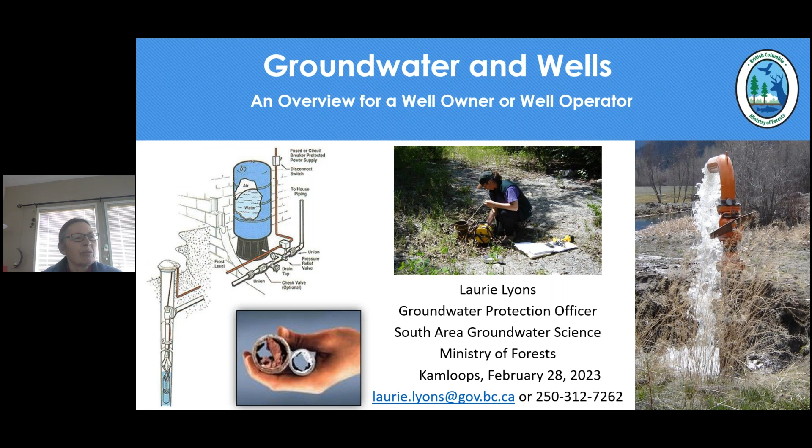Yes, many of the common groundwater well problems involve water quantity and quality. These may be naturally occurring or from a man-made issue. Identifying the cause of the well problem is necessary to determine what treatment to use to effectively fix the problem. Early detection and diagnosis of a well problem may prevent you from having to decommission the well and drill a replacement well.

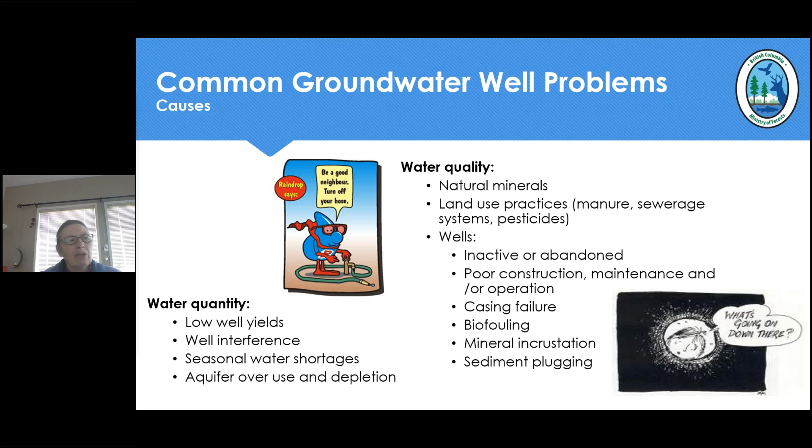Detecting a decline in the well's capacity is key to successful rehabilitation. If the well's capacity declines greater than 20%, generally, preventative maintenance is no longer going to be effective, and chemical or mechanical rehabilitation will be required. So understanding well deterioration causes is essential to designing effective preventive maintenance and monitoring programs. Your groundwater knowledge and understanding the components of your well and how to properly maintain them will help ensure well yield is sustained and protect your water quality.

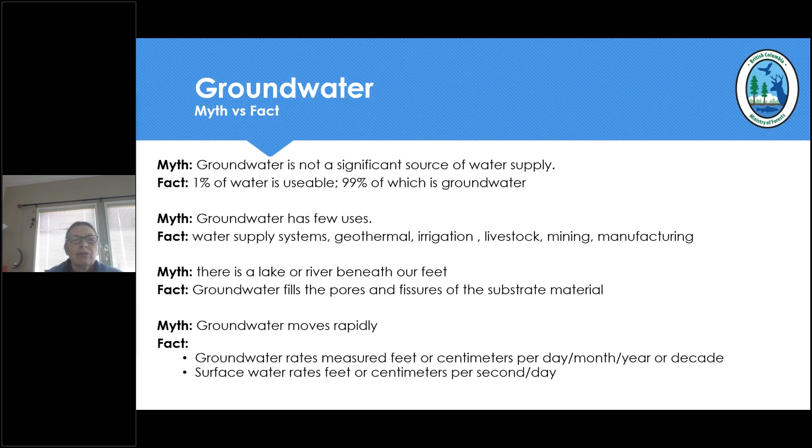To groundwater. 1% of the water on this world is usable, and 99% of that is groundwater. Groundwater fills the pores and fissures of substrate material. Groundwater moves very, very slowly. It's measured in feet or centimeters per day, month, year, or decade. Thus, the water you use from your well is often years old, or it can be hundreds of years old. In comparison, surface water rates are measured in feet or centimeters per second per day.

Another myth is that there's lots of water and it doesn't need to be conserved. That's not exactly true, as pumping groundwater at a rate greater than the recharge rate, which is replenishment of the aquifer, depletes aquifer storage capacity, resulting in serious groundwater mining. And subsidence is known throughout the world.

Probably 80% of subsidence is from groundwater in the US. Parts of Mexico have dropped 10 meters in 70 years, which is a lot.

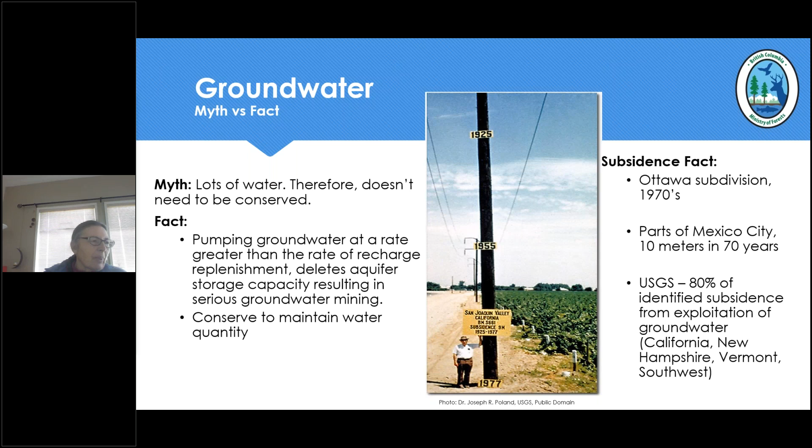The amount of water on Earth remains constant. Basically, ever since the Big Bang happened, we have the same amount of water now as we did then. What is different is where it's stored. The hydrological cycle describes the continuous movement of water on and above the Earth's surface.

Water moves from one reservoir to the next, glacier, ocean, and groundwater, by physical processes of evaporation, condensation, infiltration, runoff, and subsurface flow, as it changes through its states of liquid, vapor, and moving through the closed loop water cycle.

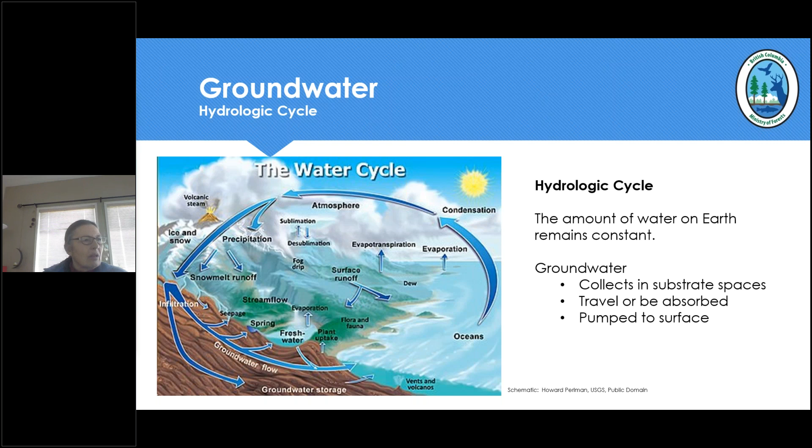This here is a schematic of a typical BC interior aquifer. The bedrock is formed from folded and faulted volcanic and sedimentary rocks. The valleys are carved out by glaciation. The glaciers melt, they deposit layers of silts and gravels. Then a river courses through the alluvial deposits, carving out cliffs of silt layers and gravels.

Wells drilled in the lower valley aquifer bottom are very highly productive, and these wells are often connected to a surface water body, depending on the substrate that they are completed in. The permeability of the materials affects the rate of precipitation infiltration, storage capacity, as well as the rate of contamination movement.

The upper sand and gravel aquifers are very vulnerable to surface contamination. Deeper aquifers below a low silty confining clay layer are less vulnerable to the surface contamination. Thus, well siting is important. If you have a well that's high, dry, and sealed, it's probably going to be sustained and receive less contamination than if your well is constructed in a low-lying area, not sealed, and will receive runoff.

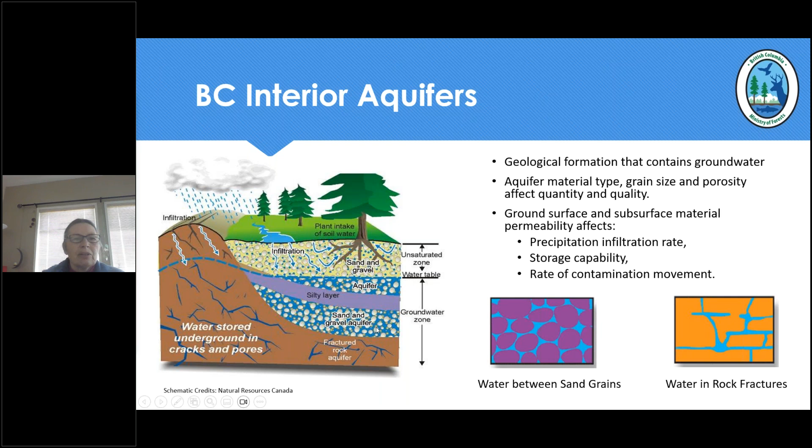The particles of the substrate, as you can see, the water fills the fractures in the bedrock, as well as filling these pores here, as I mentioned earlier. And here's the silty clay layer, and so the aquifer below is the confined layer, and the one above is the unconfined layer.

There's a lot of aquifer resources on our ministry website, and if you look at any of the mapping programs and you see an aquifer and then there's boundaries, but beside it there's no aquifer, that does not mean that there's no aquifer there. What it means is that we do not have enough information to delineate an aquifer in that area.

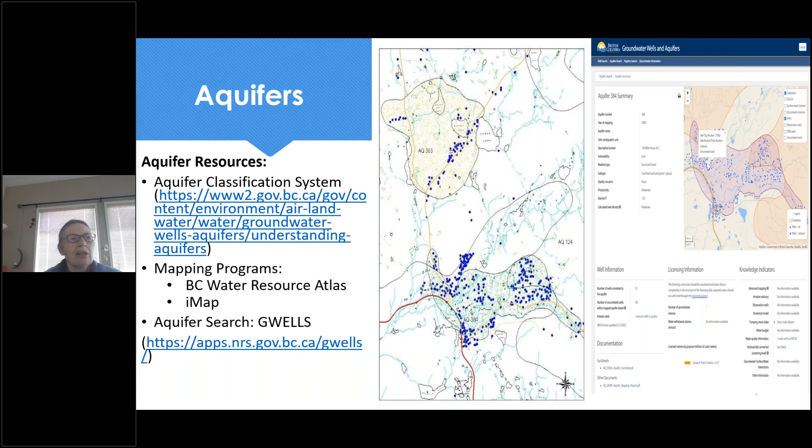Aquifer mapping provides regional context for groundwater development, enables priority setting for groundwater quantity and quality monitoring, and increases the understanding and sustainability of management of the valued resource of groundwater. It also will initiate a lot of groundwater and surface water interaction studies.

Well reports, well registration, and water licensing. They're all very different. The well records and consultant reports are very important. These provide you information of what type of material that your well is constructed in. They will also have the depth and screen intervals and water bearing areas. This is very important so that you get the right type of pump and the screen development is done correctly, as well as the size of the screen slots.

Submission of well records became mandatory on March 1st, 2016. This is the responsibility of the well driller for drilled wells. However, for dug wells, it is the responsibility of the well owner to complete these forms and submit them to the province. Prior to March 2016, well submission was voluntary, and many of the well records were submitted by the drillers as well as well owners. And these well records are entered into our provincial database, ensuring that your well is registered.

A water license is mandatory for groundwater use since March 1st, 2016. The exception is domestic use, single family dwelling. Thus, all small water systems, or most, will need a water license. Information is available on our website for water licensing and rights, as well as an application form. If there's an issue or you have questions filling out an application form, you can contact Front Counter BC.

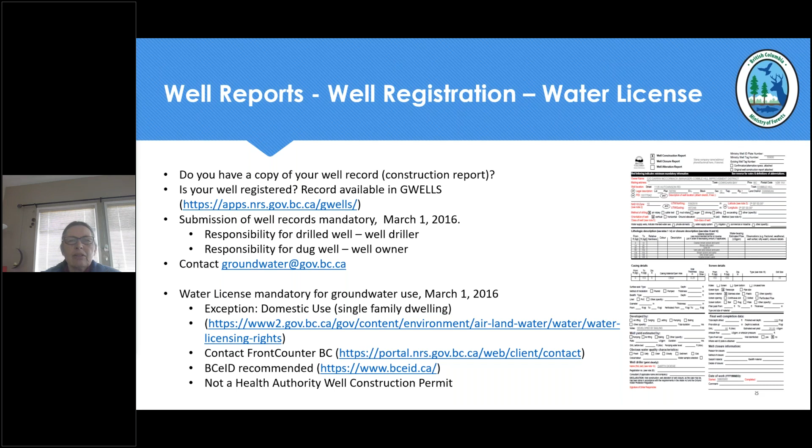It is recommended that you apply for a BCeID prior to submitting and completing a well water licensing application, as this will allow you to save and track your application. A water license is not your health authority well construction permit. They are very different processes and through different levels of government.

GWELLS. You can also get different aquifer information and well information here, as well as a registry for the drillers and pump installers. You select the tab at the top of the page here and enter your information here, and you should be able to pull up your well record. All these little blue dots are the well records.

On the registry, this is a requirement as well. Drilling and pump installing is a legislated activity, and thus we will have a registry of active and available well drillers and pump installers that can work in the province of BC.

The Water Sustainability Act restricts well construction, decommission, and pump installation, and it outlines the minimum standards for all these events. And also it will give you the requirements for flowing artesian wells, and it outlines the roles and responsibilities for well drillers and well pump installers.

The province issues the well drillers and pump installers a card similar to what you would have like a driver's license, about that size, and it will have on there what they can do, whether it's pump installation, if it's well drilling, or what type of well drilling is it? Is it geotechnical only? Is it monitoring wells only? Or is it water supply wells? All this information will be on there. It is also in the registry.

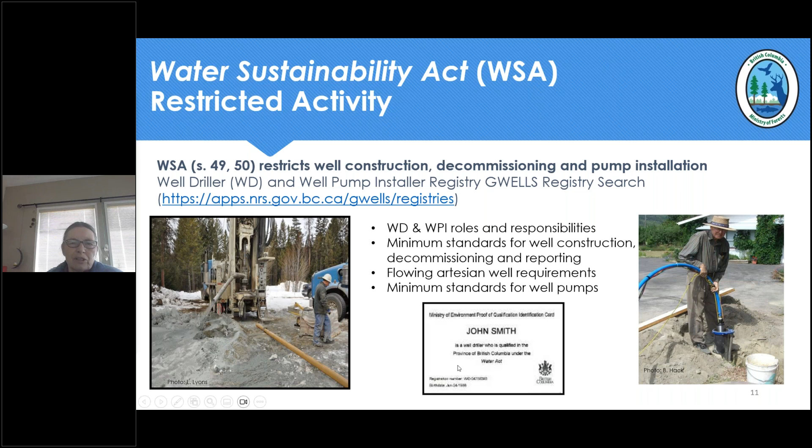Components of your well. There's the borehole, the casing, which you can see. The surface seal, you may or may not see it, as you can install a surface seal about 1 foot below the ground surface. And the well intake and the screen, this is down at the very bottom, and there'll be a K-packer in here, and that will keep the screen in place. Also, it may have a slotted liner, PVC liner, throughout the well casing.

The pitless adapter is your connection, and it's here, and it's to your water supply system. The pump needs to be properly matched with the recommended pumping rate so that you do not draw down the water below the pump and overpump the aquifer. You will have a secure well cap on top of the well.

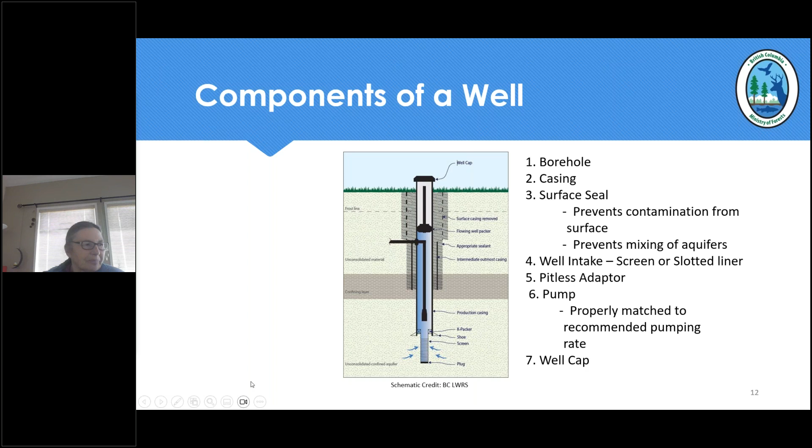Why hire a pump installer and well driller? It will protect your resource. It may also save you some money. Well owners are able to construct shallow wells less than 50 feet in depth, but they must be constructed to meet the groundwater protection regulations. However, it could take you days, months, years to do that, and a well driller may be able to do it in half a day or a couple days.

When you open your well, if you take the well cap off, you will see wires, cables, and ropes all stuffed in on the top of your well casing. It is very important that you do not pull them, as they are there for releasing the pump and to pull it up, as well as releasing the pitless adapter. And if you do pull on them and it does get released and it drops down, it could be quite costly because you may not have the rope anymore to pull the well pump and drop pipes out of the well. Thus, you might have to fish for them, or you might have to close the well and decommission.

Also, if there's a sudden decrease in pressure, your water system will create a vacuum and your pressure tank may collapse just as this one did. Also, here's a pump that was burnt out, maybe an oversized pump for what the well capacity was. Sometimes if you don't have this information, it might be a bit of a guessing game to get the right size of pump and the rate of pumping.

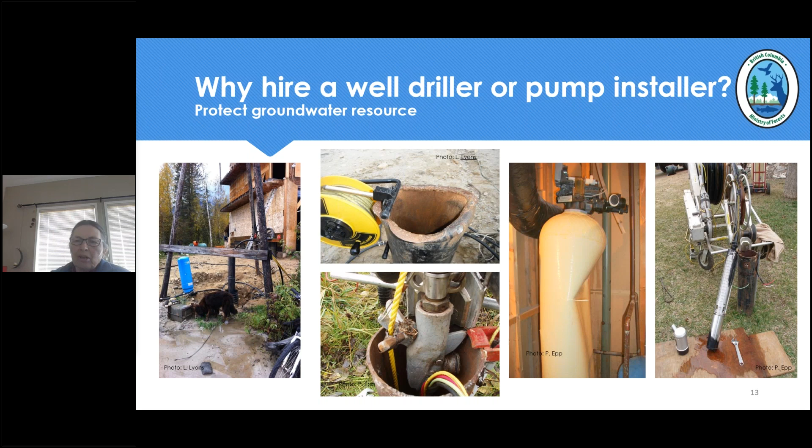Well location, very important. You should be set back from contaminants, and contaminants should not be allowed to travel or be stored within 3 meters of the wellhead. Consider where your contamination sources are. Obviously, a sewage system is a source of contamination, and it should not be placed right beside your well, because as you pump the well, you speed up the travel time of any contaminants.

Also, with wells close together, you can have interference. They are allowed if you are the owner of both wells. As in this case, this was actually a school, but rarely are you pumping both wells at the same time. They may be low producing wells and you pump one and then the other into a storage container, and then it's used from there.

Also, consider where your wells are in relation to buildings. The equipment for drilling and pump installation is quite large. And if they can't get over top of the well to fix it, you may have to remove a building, or the well may have to be decommissioned and a new well drilled.

Also consider where your power lines are going, as a power line over top of a well might require BC Hydro to disconnect your power so that the well can be worked on, or it may result in periods of shutdown for the well driller, because if the wind is blowing, those lines will move a lot and they may become entangled into the drill rig.

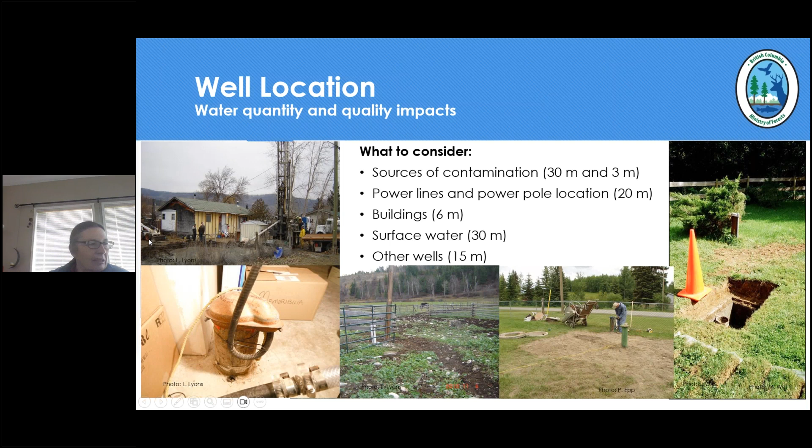What kind of well do you have? Is it abandoned, inactive, as in this first picture? This also could be an abandoned, inactive well in a pit. Do you have a dug well? Do you have a drilled well in a pit or vault, which was very common prior to the invention of a pitless adapter? This was done so that the water didn't freeze, as you generally came out of the top of the well and then it went underground and connected with your water distribution system in the houses.

As you can note in this here, the water was above the electrical. I'm sure this resulted in some wiring shorting out. You may have a drilled well, and the pump installer may install this plastic PVC box on the outside. This is usually for extra security and attachment of the cables and wires inside the well.

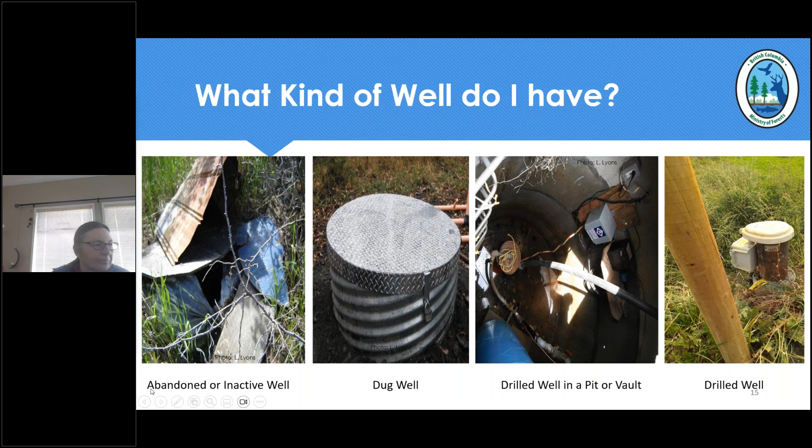Inactive and abandoned wells can impact your water quality. And if there's enough sedimentation going in, they might even impact your water quantity. It is your legislated obligation to maintain wells until they are decommissioned. Decommissioning is required after 5 years of not being used. You must hire a well driller or pump installer to decommission the well.

In this photo, this person is decommissioning the well. And it's probably a deep drilled well, as it's got a tremie line in, and they're pumping grout slurry into the bottom of the well, and it will gradually fill, and they will withdraw the tremie line and fill it to the top of the line and put a cap on top, and then backfill and put the pavement back.

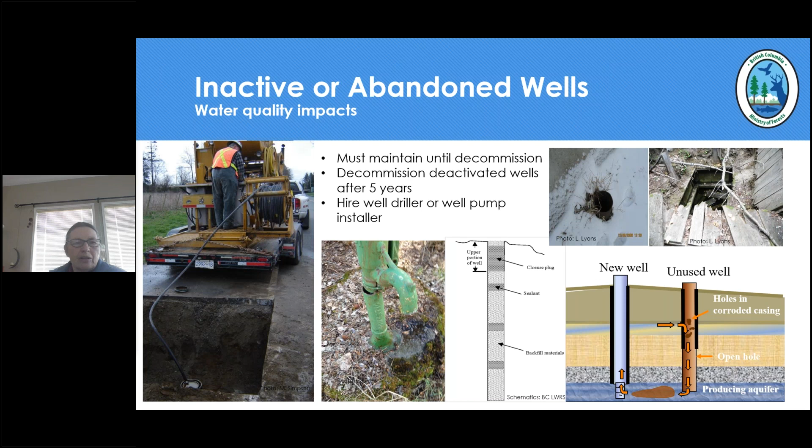Types of well construction standards. They're very similar for dug wells as well as drilled wells. The surface seal must be installed. It needs to be 15 feet or 5 meters in length and 1 inch thick, or fill the void if you are constructing a dug well. You can also, for a dug well, give it a consistency and sort of mold it around the well casing so that it's 1 inch or 2.5 centimeters thick.

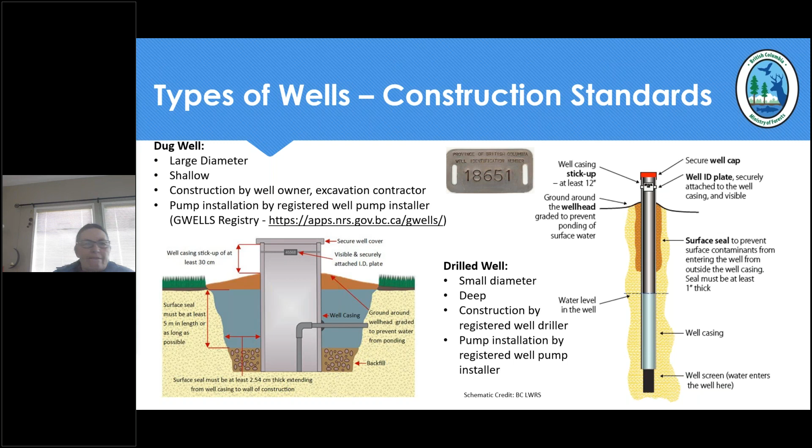Dug wells as well as drilled wells both need secure well caps and covers. All water supply wells require a well ID plate attached to the casing. And bedrock wells: drilled wells into bedrock must have the casing securely anchored into the bedrock for 1 meter.

We recommend a PVC liner be put in these wells, mainly because if you leave it as an open hole and you have your pump in there, it's not a legislative requirement to have the liner, but if that rock falls off and wedges between your pump and the borehole wall, you may not get that pump out, and that could be very costly. You may have to decommission it to fix it because you can't get the pump out.

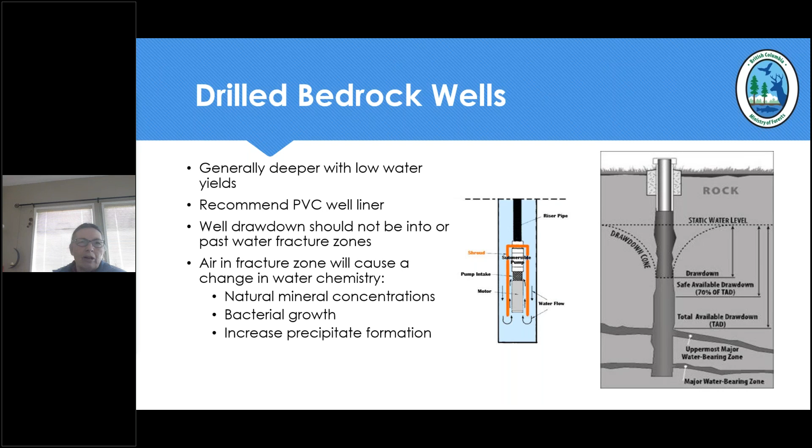Wells in pits also must meet the well construction standards. You must have a stick up of 1 foot above the floor of the pit, a secure well cap, and they must be drained. If they are not draining properly and the pump kicks in, often that water can be sucked down into your well, impacting your water quality.

If a well is altered, we highly encourage well owners to bring the pits above ground surface. And if not, then a professional needs to be hired to design the pit and oversee the construction. And the same for constructing new wells and pits. These designs and as-built drawings must be submitted to the comptroller for approval prior to construction.

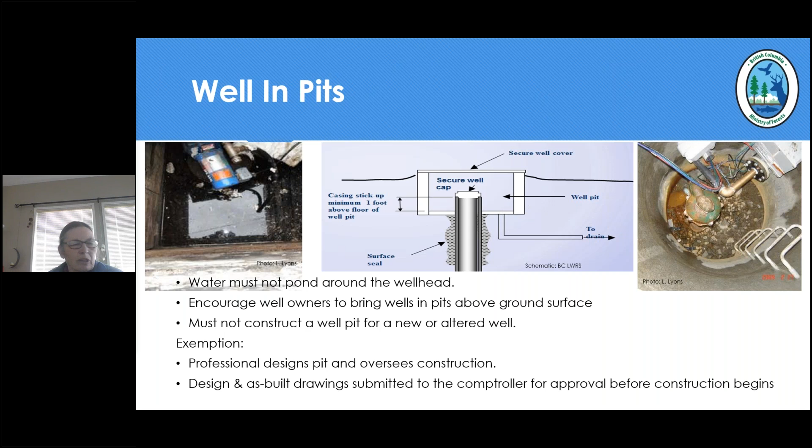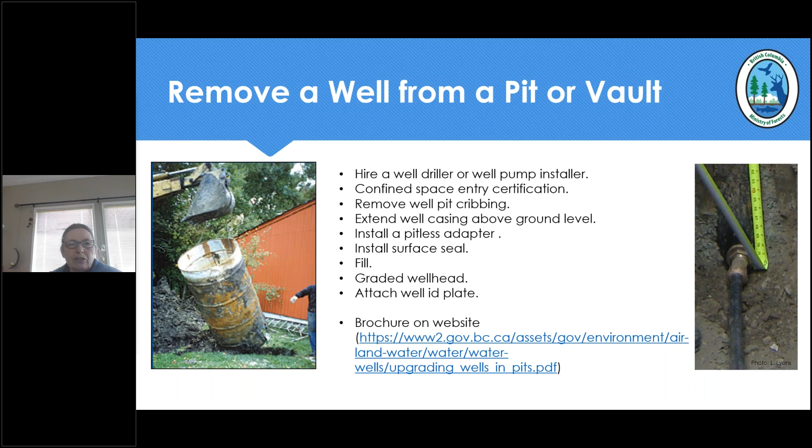Removing a well from a pit or a vault, you must hire a well driller or pump installer. If it's a flowing well, you must hire a well driller with confined space entry certification, removing the cribbing, extend the casing, install the pitless adapter, surface seal, backfill, grade around the wellhead, and attach the well ID plate.

Surface seals. Here you can see that the surface seal is continuous in the photograph on the right here. And you can see that it completely fills the borehole. And once the pump installer is done installing the water distribution line here, then they will reinstall the surface seal and backfill.

Here you can see the grout at the ground surface. Grout will also be for flowing artesian wells or high pressure wells between multiple casings. And you can see that, and it will be also around the outside of this casing.

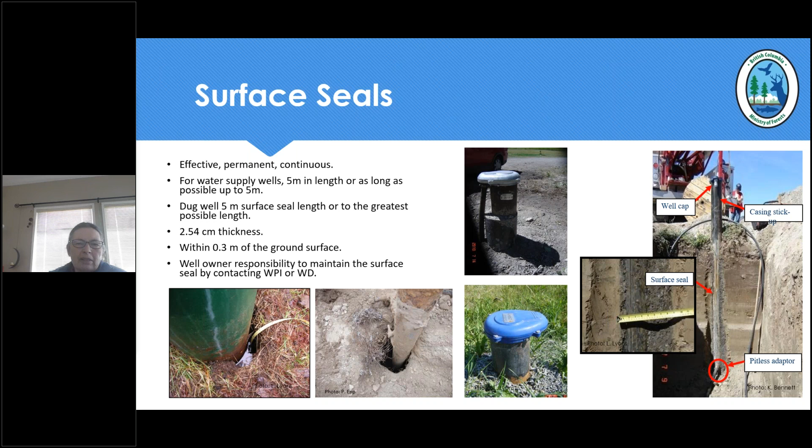If you do see an annulus appearing around your well casing, do not fill it with pea gravel. This only accentuates the movement of water as well as contaminants down along the well casing. It is your responsibility to maintain the surface seal by contacting a well driller or pump installer to replace the well surface seal.

Well caps and covers. They must be secure and vermin proof. Thus, flower pots, pails, plywood, rocks are not sufficient well caps and covers. If you have a hand pump, it must act as a secure well cap. Punching holes for ropes to be wrapped around the outside of the well casing will impact the well cap, and it makes it no longer a secure vermin-proof cap.

Sanitary seal well caps are approved, but the bolts must be in place. These hold the plates together, and also tightening those bolts will push the rubber out and seal it against the well casing.

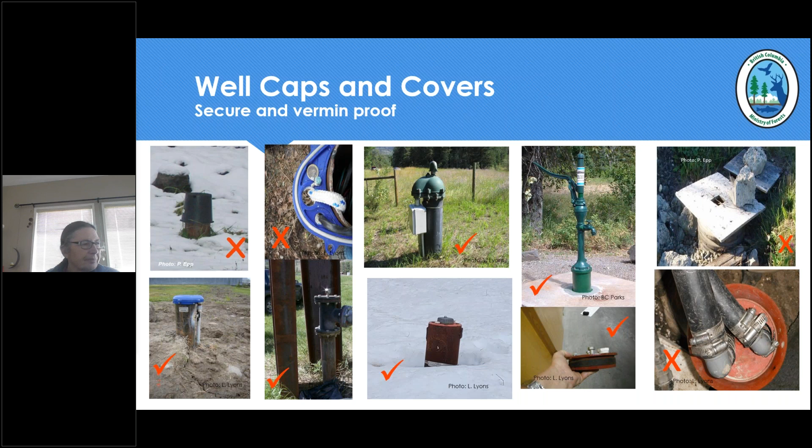Also, if you're spreading fertilizers and stuff, consider where you're spreading close to your well, as these pellets melt when water comes, and you don't notice or maybe taste or smell the fertilizer in there. It is only detectable if you are taking regular chemical water samples and having them tested by the lab.

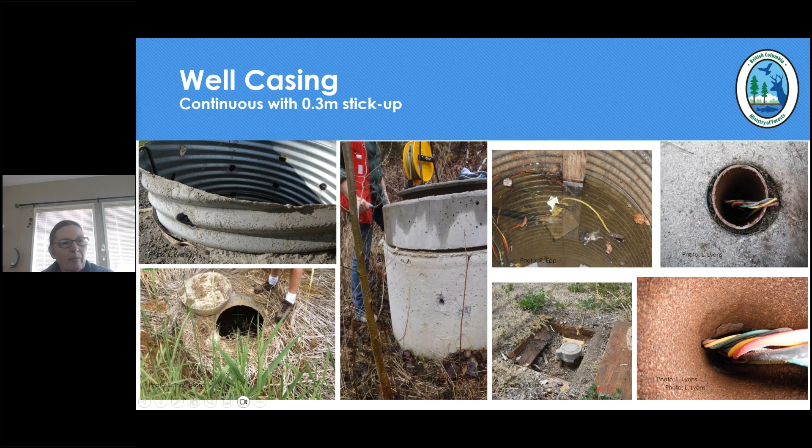Wellhead accessible and protected. You must protect them from physical damage. Well casings, even if they're steel, they can become damaged and dented, and you will not be able to remove the pump. PVC deteriorates in sunlight, and also they spiral or fracture if you hit them.

Keeping contaminants and trees and things back from the wellhead. Roots, they love holes in well casings, and this will decrease the availability of the water for your distribution system. This well does not have a cap on it. There was about 1 foot of debris in that well. I was amazed that it was still working.

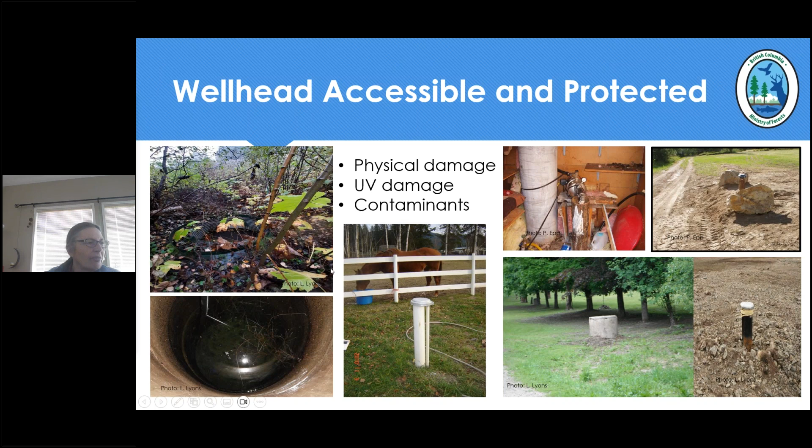As I mentioned before, contaminants should be 3 meters back from the wellhead. Even though this well is very clean, it is open to the dug well below the floor. If these paint cans spill, there is the potential for it to flow directly into the well.

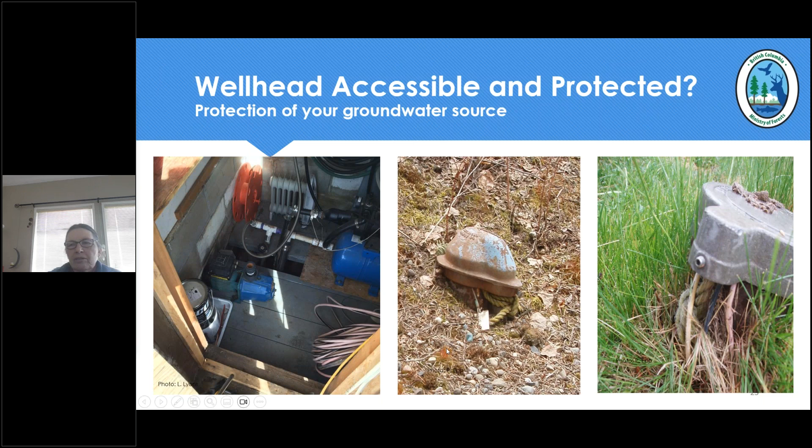Also, this rope, if it's exposed, it deteriorates. Also, there's potential here for more contamination to get into your well. And here you can see that even rodents have been chewing on the wires and stuff. So protecting your well and your source of water.

Good summary for the legislation. Where are your contaminants stored? Location of your well. Protect your well casing from damage. It must have a stick up of 1 foot above ground. Replace a damaged or lost well ID plate. Have a secure well cap. Keep the ground sloped so water doesn't pool around it, and fill any visible annular space with sealant.

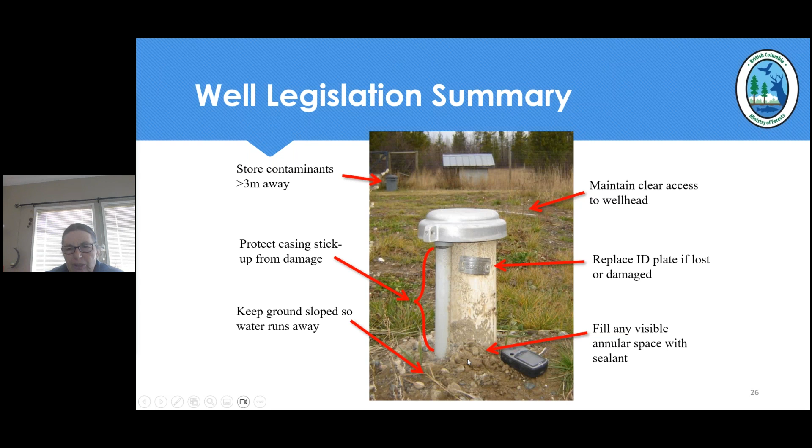Artesian flow from a well must be controlled. This can cause flooding damage and subsidence. It may lower the confining pressure and affect neighboring wells, springs, streams. Artesian wells must be constructed and decommissioned by a water well driller.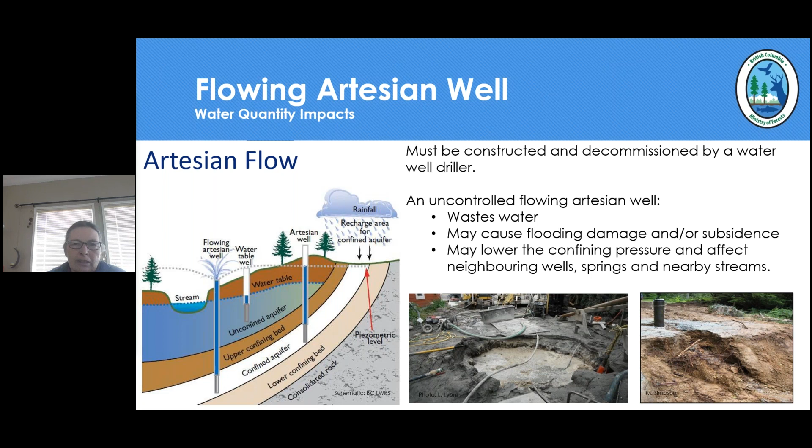If artesian flow is encountered suddenly, you should contact and get a well driller or professional that is competent with drilling and controlling flows on site immediately. Flowing artesian wells are under control when they're clear of sediment and the flow is entirely through the casing. Here you can see the flow is coming outside of the casing.

They must be mechanically controlled either with a shutoff valve or with a mechanical packer that is installed outside the well casing. This is great for low flow wells, and this is the preferred method with a big shutoff valve for high flow wells. Often they will have multiple casings, and even other wells that are under pressure will have multiple casings to ensure that the pressure is not loosening the casing, as well as flow is contained below surface and through the casing.

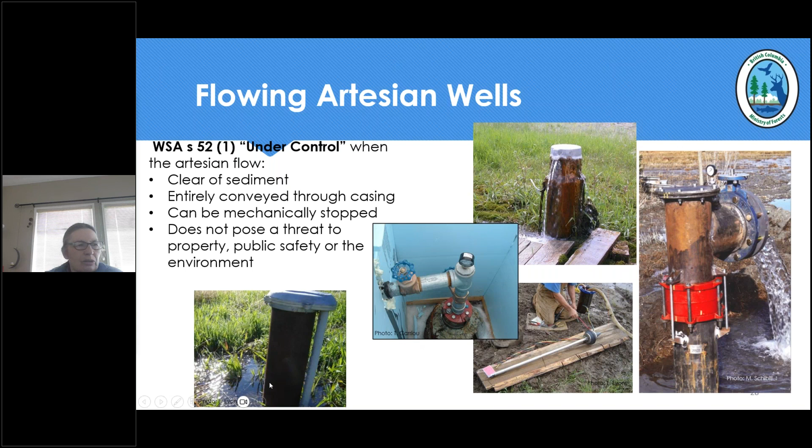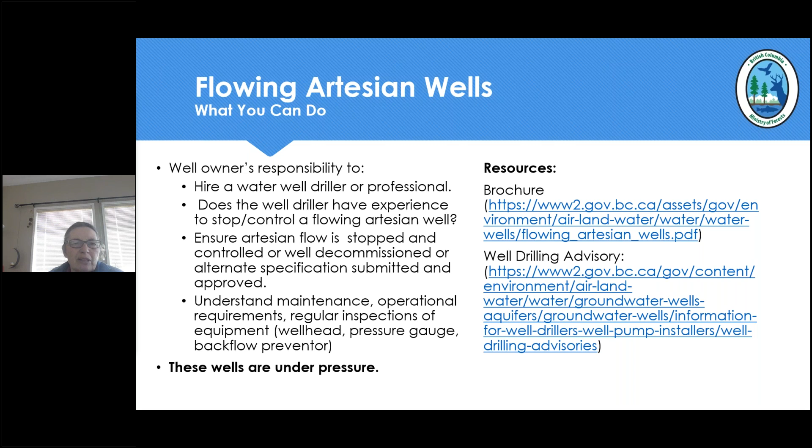It is your responsibility, as I mentioned, to hire a well driller or professional with experience of flowing artesian wells. It must be stopped or controlled. Also, alternate specifications can be submitted for approval. Understand the maintenance and operational requirements for artesian flow wells, because they will be equipped with pressure gauges, backflow preventers, and you must be able to maintain this equipment.

Aquifer depletion. It is not always from flowing wells. It could be overuse, drought, climate change, and also if you had noticed a drop in well yield, it may not be. It could be something that's happening downhole in your well. This is a provincial observation well. We measure the water level hourly and periodically the water chemistry. From this are generated state of environment reports that are available on the website. They will say if the aquifer that it's completed in is stable, declining, or increasing. So yeah, there's lots of information.

Also, with the observation wells, you can look at the hydrographs and you can see for the interior aquifers that the main recharge happens in the spring from the snow melt, and there is a smaller recharge in the fall from precipitation. In the coastal aquifers, it will be the reverse. The spring will have only a smaller recharge from the snow melt. The main recharge for coastal aquifers is in the fall, and that's from precipitation.

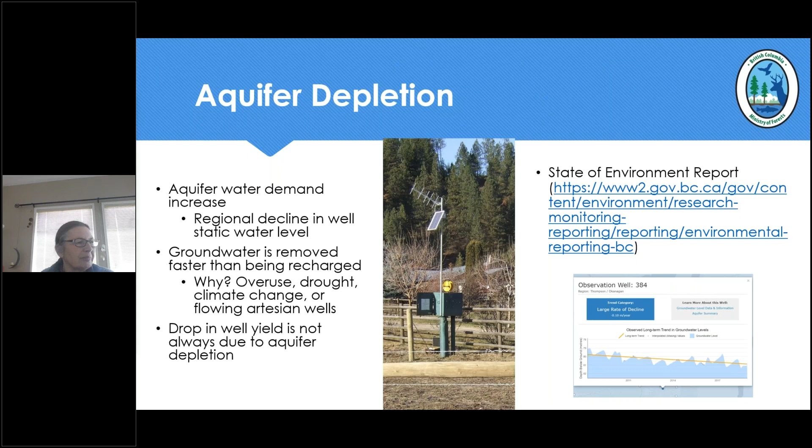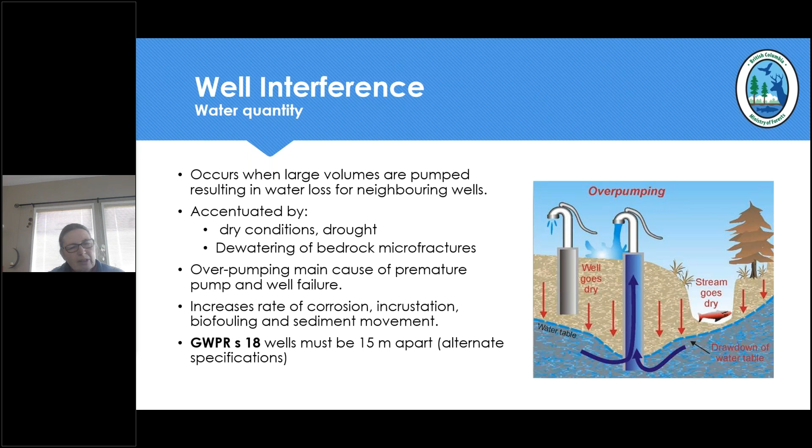Well interference occurs when large volumes are pumped, resulting in water loss in neighboring wells, streams. It can be accentuated by dry conditions and dewatering of bedrock microfractures. Over pumping is the main cause of premature pump and well failure. And this increases the rate of corrosion, incrustation, biofouling, and sediment movement into your well. Just as a reminder, wells should be 15 meters apart, or alternate specs can be provided and approved by the province.

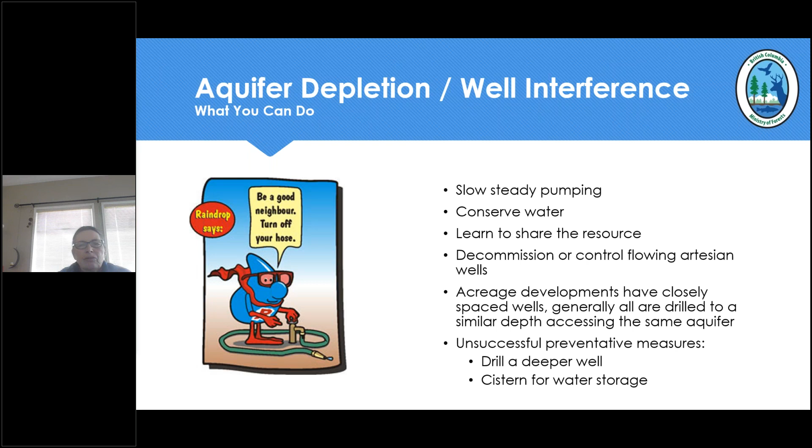Aquifer depletion and interference. It's good to have a slow, steady pumping versus hard and fast. Learn to share the resource, decommission or control flowing artesian wells. And if these preventative measures are not successful, you may have to drill a well deeper or install a cistern for water storage.

Water quality and quantity. There's lots of downhole impacts. Some of these are naturally occurring minerals, and as I mentioned, you can't always smell or taste toxic metals. This needs to be tested. It's good to have a lab do these tests and do it periodically, just so that you know if there's any changes over time. You can do home tests in between, and it'll give you a rough idea, but lab tests are definitely preferred.

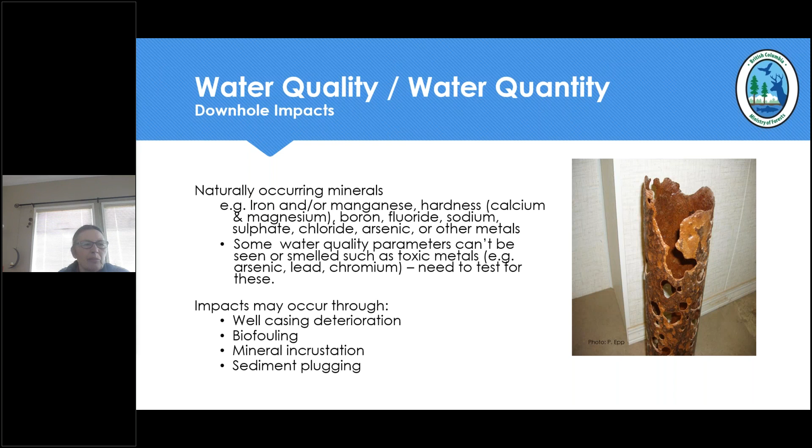Other impacts that can occur downhole: well casing deterioration. This one here is probably one of the more severe ones that have been noted. I did show a picture of the flaking earlier. If it carries on, it will totally deteriorate. Biofouling, mineral incrustation, and sediment plugging are all other downhole impacts.

Biofouling, what is it? Nuisance bacteria that accumulate in your well. Usually they're iron related, sulfate reducing, and other slime forming bacteria. Pumping a well increases the nutrients and oxygen, leading to an increase in production of slime in groundwater susceptible to bacterial conditions. It will also increase the corrosion of steel and iron parts of your well. It's an impact to your well and water distribution. It will also decrease your well yield and water quality.

And also, I mentioned earlier, if you have your well in your crawl space or anything, can you imagine pulling this up through your house if you fix your well pump? You might be doing a lot of flooring reinstallation.

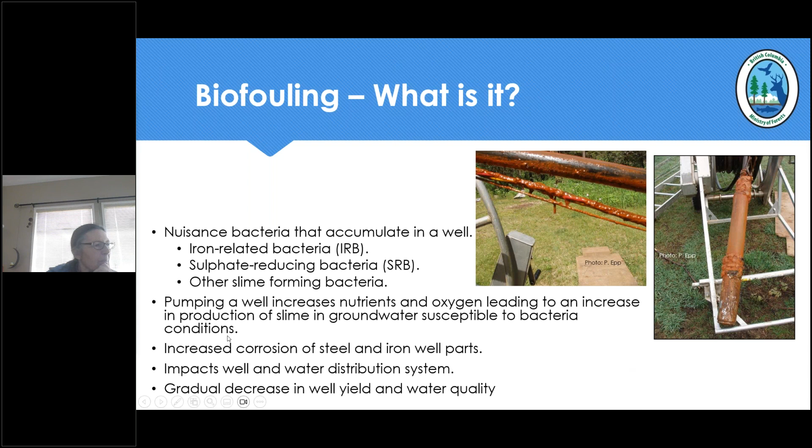What you'll notice is slime buildup on plumbing fixtures. There'll be a water discoloration. You will also see staining of your laundry. You may have a rotten egg smell. There also could be black precipitate if it's manganese, and it's orange if it is iron. It will decrease your yield, as I mentioned, and corrosion is a big part.

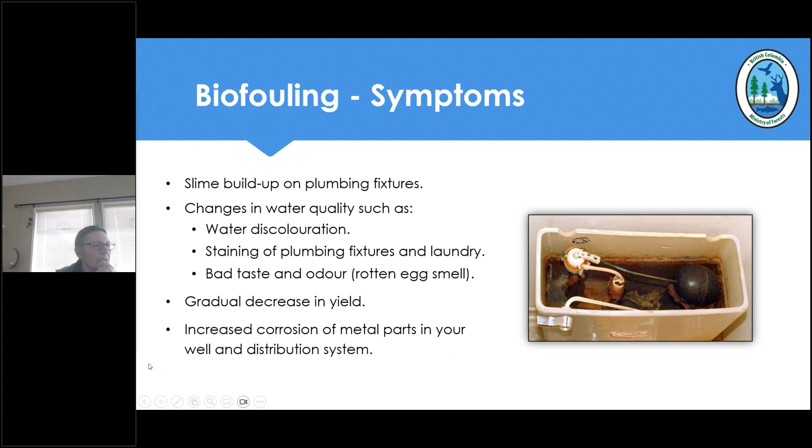Biofouling, what can you do? Detecting the biofouling bacteria is very hard, but if you are regularly testing your well and you notice that there is an increase in bacteria, E. coli or other bacteria or anything in your well, usually these also get trapped in this biofouling as it builds. So it's good then to disinfect your well. Contact your well driller and pump installer, and you may want to clean the well before disinfecting.

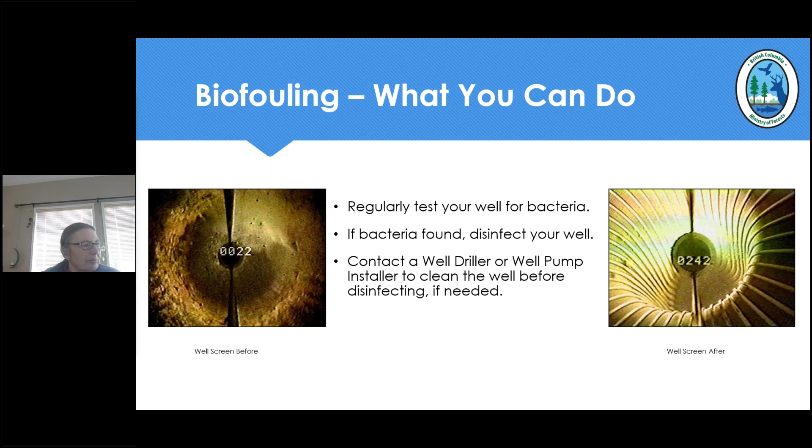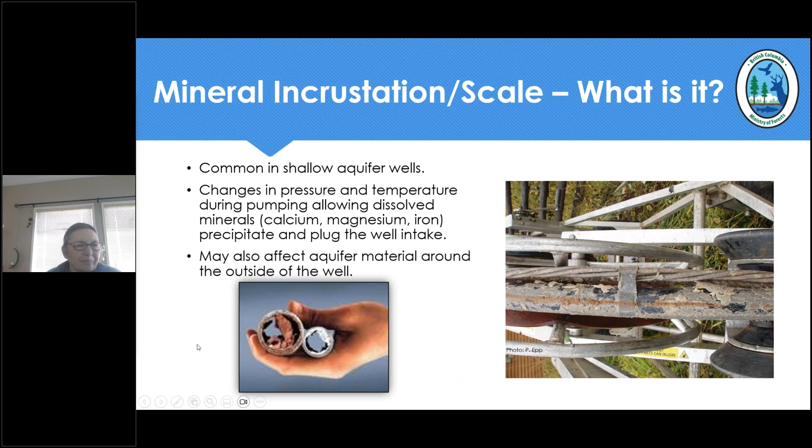Actually, mineral incrustation is probably more common in shallow wells or highly mineralized bedrock aquifers. Some symptoms are buildup of material on your plumbing fixtures and inside your well. You may notice a decrease in your well yield. You can perform a chemical analysis to determine the risk of incrustation; reducing your pumping rate and going for longer pumping intervals may help the rate of incrustation.

Hire a well driller, a pump installer to clean your well. This here, the brush goes up and down in the well. It's actually pretty cool, and when they put some of the chemicals in, it's all this foaming and cleaning. And this here is when they're pumping out after they clean. It is quite a lot of goop that can come out of your well.

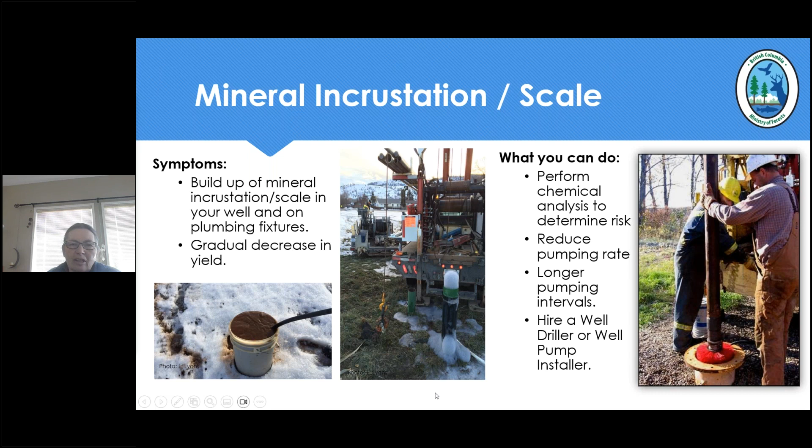Sediment plugging. Excuse me. What is it? Sediment plugs your well screens and your surrounding aquifer. It is accelerated by poor well design and construction. This is where your well screen may not have been the correct slot size for the material that it was in. If the screen was very large and you had fine sand, it'll be moving faster into your well than it should, clogging up everything and decreasing your water availability.

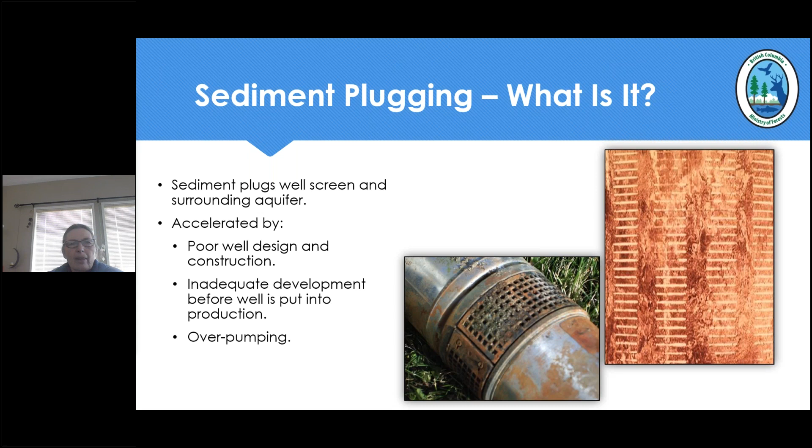Also, it could be from inadequate pump development. When they first drill the well, they pump out all the sediment that is stirred up as they are drilling. And also sediment plugging can happen if you're over pumping your well. You will notice sediment in your water, a decrease in the well yield. Wells won't provide the amount of water they used to. The static water level will probably remain the same, but the water level declines when pumping.

For existing wells, you can reduce the pumping rate, provide storage, ask a professional to look at your well. For any new wells, make sure that you talk to well drillers and pump installers about the proper design and development to ensure your system is designed to meet your needs as well as based on the well capacity.

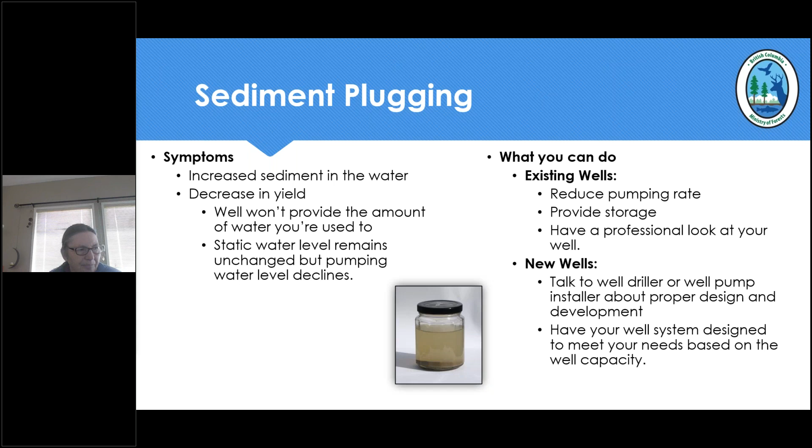When to test a well. Definitely test a well in early spring after freshet, just in case any bacteria loading has moved into your well, or maybe gone down the casing if an annular space developed around the outside of your well. Also, after any major plumbing work or work on your well pump, after you move into a new home, when you detect any changes of water color, quality, clarity, taste, and often we recommend if there's new children, newborns, to have the water tested.

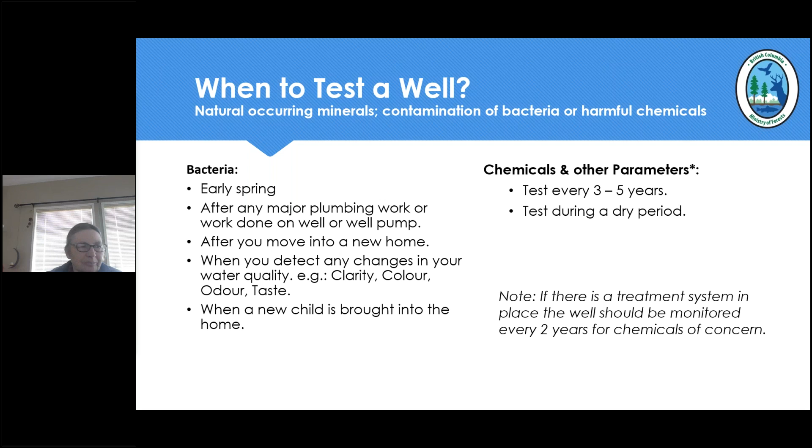Chemical and other parameters, you should test them every 3 to 5 years, and preferably test during a dry period. If you are in an area where you suspect that there are chemicals or there's been a spill, you may want to test earlier just to ensure that your well has not been impacted. When to disinfect a well?

Immediately after installing a new well, when you repair or replace your well pump or distribution system, if you notice a change in your water chemistry, water clarity, color, odor, taste, when lab results are indicating you have high coliforms, when slime is present in your tank.

But before disinfecting, you should inspect your well. Are there sources of potential contamination near your well? Is your wellhead protected? Is the cap secure, vermin-proof? Does the well stick up above the ground surface or the floor of your well pit? Is the annulus filled with grout, with no spaces where there could be leakage, and no cracks in the well casing? Is it finished below grade?

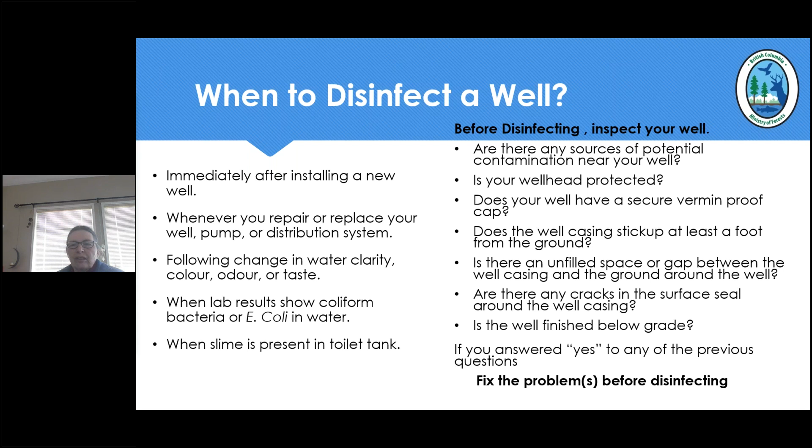All these things may impact your water quality and be causing the well to deteriorate. So fix the problems before disinfecting for a better result.

Your groundwater and your well are a shared resource: family, neighbors, environment. So regularly inspect your well, and upgrades and maintenance are required. Do them immediately. Don't put them off. Regularly test your water. Keep good records of the water levels, testing, chlorination, repairs, maintenance, pumping test reports. All these are very important for your water system.

A lot of these reports seem to get lost for older systems or in transfer of systems from one owner to the next. But do ask for these reports, because you may need them; you may not get the same pump installer or well driller back that has worked on your well in the past. The well is only a small part of your water distribution system. So do take care of it, it is important. It will decrease your water quality and quantity if not taken care of properly.